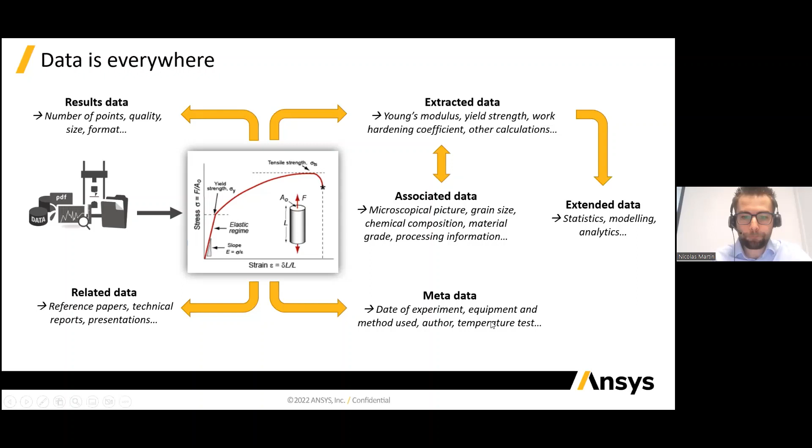Not only is data everywhere here, but it's also available in multiple formats. And the increasing complexity of data formats also allows increasing value to be extracted from it. If I start by talking about 1D data, one-dimensional data, which would be properties of one data sheet, for example, or one property chart, such as shown here.

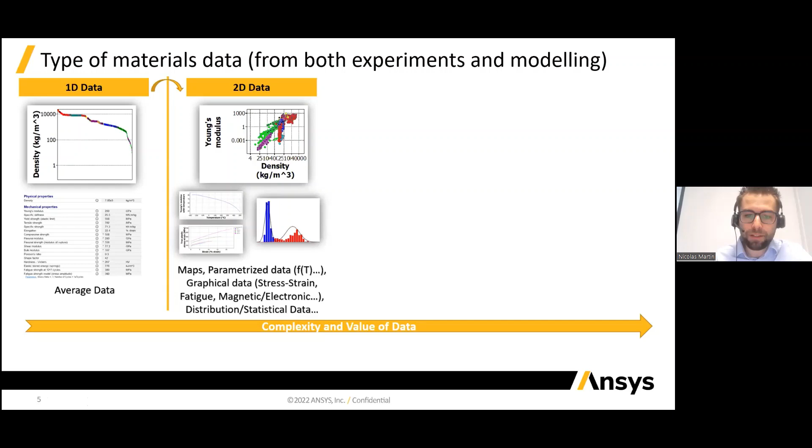If we think about what is available as two-dimensional data, that can be a combination of two properties about materials, such as Ashby plots shown here. But it can also consist of functional data, data evolution against time or temperature, or even statistical distribution of a property, which gives more insights on what the material really is. It's not just one point of property, but a distribution that can be linked to some understanding at the microscopic scale, for example.

And then there's three-dimensional data or other types that also exist, and there's more complex things like sample mapping versus a certain type of property or composition, two-dimensional data sets that are dynamic, such as shown here in this dynamic map, or other types of images, microstructural maps, mixes of data, or even sound that can be associated with materials data.

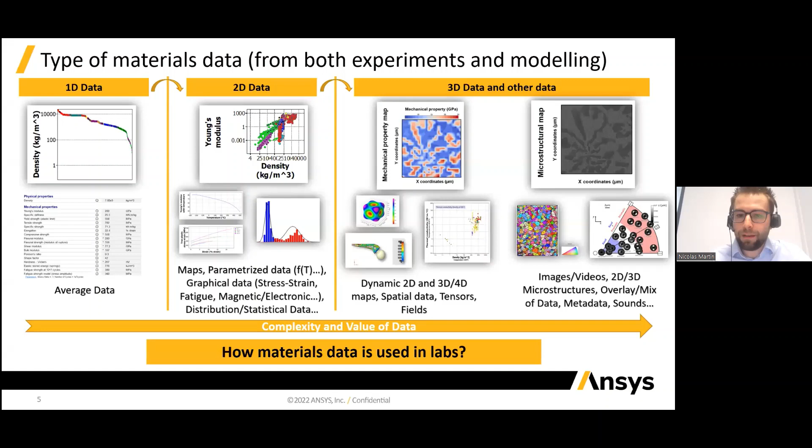So this shows that the growing complexity and levels of data available also enable different, increasing levels of insight and value of data that can be extracted. The question is how typically this type of information is being looked at when you think about research labs.

There's quite commonly two typical materials data journeys in a research environment, which both start with the level of data collection or capitalization. That can be either capitalization of literature review, scientific literature review, but also combining together experimental or simulation outcomes that are being run. And this would typically be digitalized to have access to some form of database.

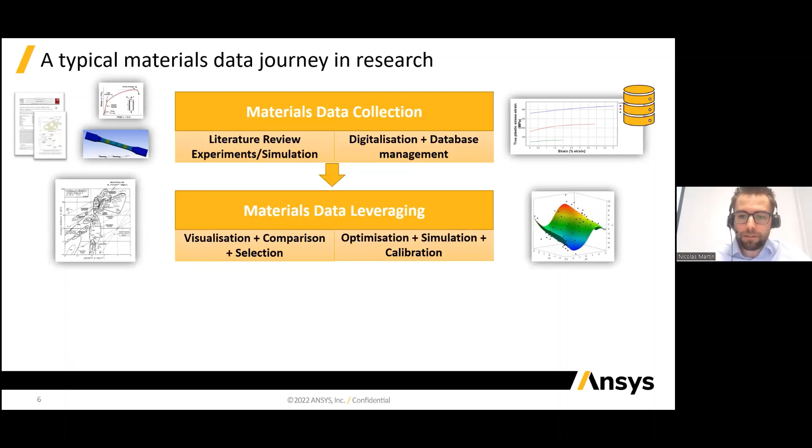Then from there, the next step is actually to look at leveraging the data, trying to understand some concepts or fundamental science behind it, and that can be done through visualization or selection of material, or looking into optimization and calibration of different compositions and properties that we are exploring.

But typically the purpose is to fulfill two major types of research profiles. One is to work on materials and process development, and the other is to work on product design or redesign.

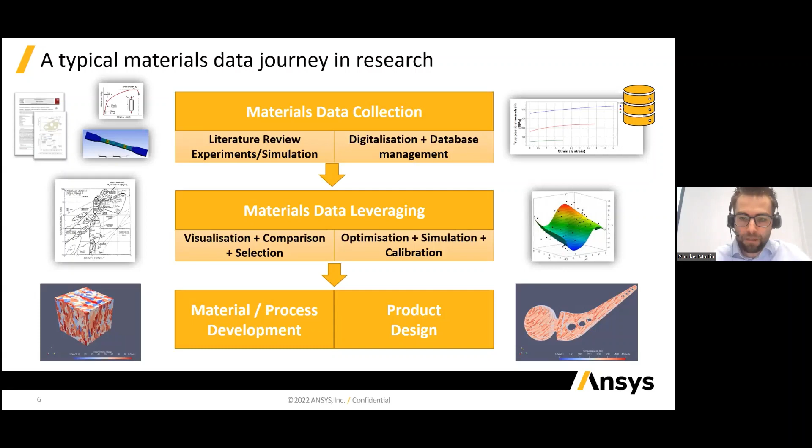So if we look a little bit about these two types of scenarios, an example of material process design strategy is the following one. It's quite common that the starting point is actually to identify some sort of motivation.

A nice way to actually do that is typically to look at the property space of the most commonly available materials and try to identify where there exist holes. By holes, we mean spaces on the charts that would have an interest to be populated by new materials or improved materials, given that it would enable better performance compared to existing materials.

So in this particular example that I'm using to illustrate this, on the left here I'm plotting Young's modulus versus density for the main families of materials. The dotted lines that have been added here represent the contours of a performance index of a panel in bending.

In other words, if we gradually shift this line here towards the upper left of the chart - emphasizing that here we're looking at a chart on a log scale - we are gradually improving the performance index of materials within the line, meaning that if we find a way to actually create materials that fill in this empty space, it will most likely outperform every material for that application.

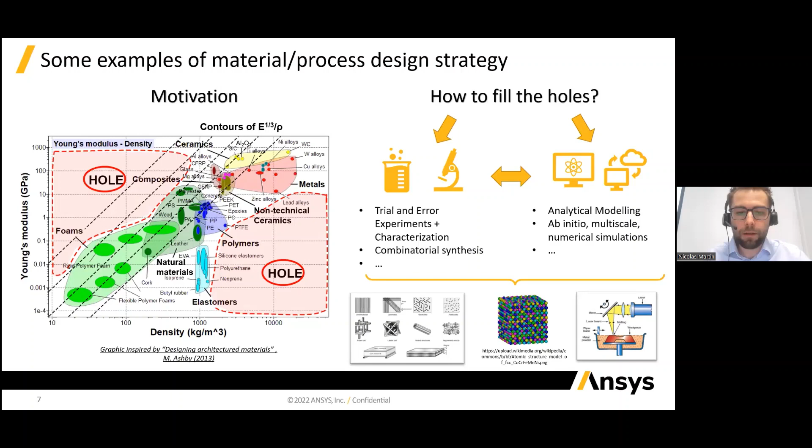And once you've identified the motivation, you can actually look into how to fill in the holes that are mentioned here. That can be either through trial and error experimentation, which is the most classic approach, but it can also be through a different approach, through analytical modeling, ab initio, multiscale, and numerical simulations. The most common practice nowadays is actually to try to find a way to combine those aspects, experimental and modeling, in terms of exploring the property space.

And I was mentioning the creation of these property maps. So one of the things we work on in the Ansys Granta space is a software called Granta Selector, which combines a library, or encyclopedia if you will, of different sets of reference data. Here, where it helps in terms of identifying motivation for research, is that it provides a good ground base for existing materials.

But it also allows for a bit of analytical combination of materials on things such as the rule of mixture for composites, analytical models for hybrid materials, multi-layers, and so on, which basically would enable us to see the potential of combining existing greater materials into new structures, new formats of materials, and see how they would outperform the existing material property space.

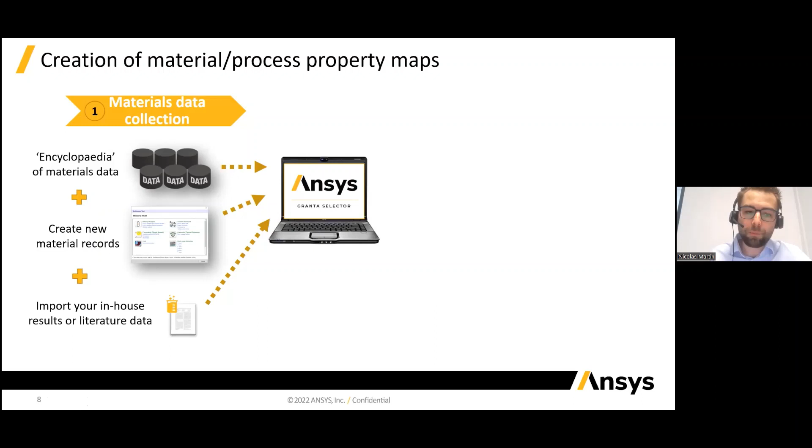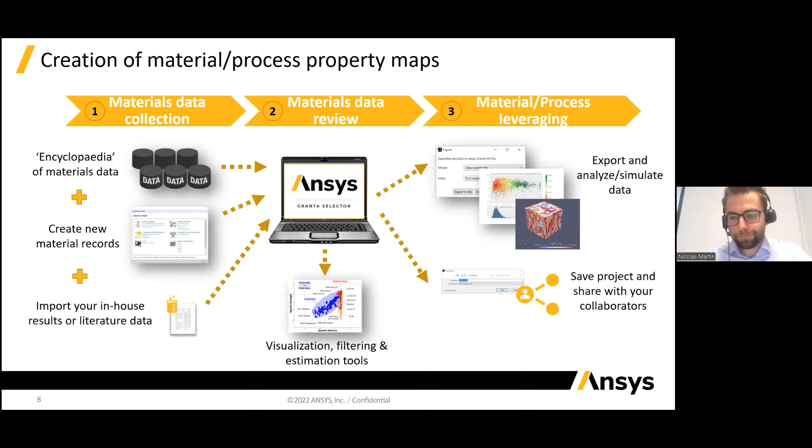And by doing that, you can start to communicate and argue on the potential and the direction that different research projects should be going into. So that was about the material and process development approach.

These top candidates would typically be used to go on the next stage, where you look at the optimal design, and that's where you would use the material candidates for finite element analysis setups in order to benchmark the materials and find optimal design. The intent behind is there again to evaluate the trade-off between the different objectives that are fixed within the project's description. And it's quite common that this is actually not really a linear process.

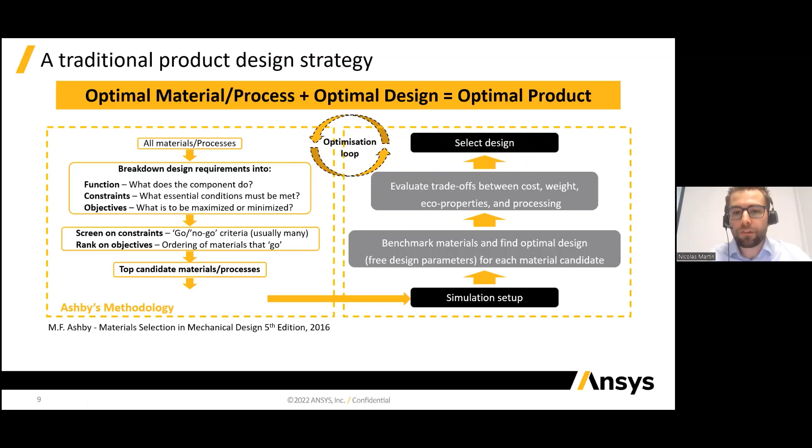And to keep things short, it consists of taking into account the fact that in the vast majority of cases, 80% of the future costs of product development are embedded in the initial design stage. And by finding a way to do what-if scenarios at a simulation scale, or if you will, deploying some level of virtual prototyping much earlier than the way simulation is used nowadays, if you're able to achieve that, you actually make a lot of progress in terms of time and cost savings compared to traditional design.

Another approach to advanced design strategy is integrated computational materials engineering, or ICME. And this is trying to have an approach where you look into process, structures, properties, performance, and multi-scale interaction, where basically at each level of scale of product development, you have an approach of experimental and modeling that talks to one another within the same scale, but also with the different levels of scale.

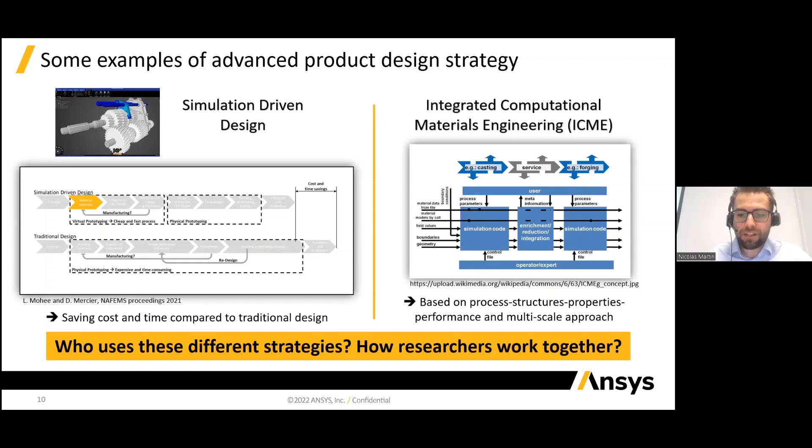In these cases, there are typically PhD or postdoc students who are the most active in terms of running some of the experiments or simulations. And it's not always the case that they are familiar or have the best practice in terms of doing capitalization of their data. Now, they would typically be discussing a lot with their direct supervisors, who typically would like to have easy access to analyzing the tons of data that their students are generating to look in depth at some of the analysis that can be done.

Most research is also nowadays connected to a more modeling or numerical plan of a project. So most likely within the same research group, there will be a numerical modeling expert involved. And for him, the interest in terms of material data access is to know which material inputs he should be using for the simulations and what are the models that have been confirmed by experiments. And finally, there can be some external partners for whom the interest is to have access to the homogenized data from their academic partners.

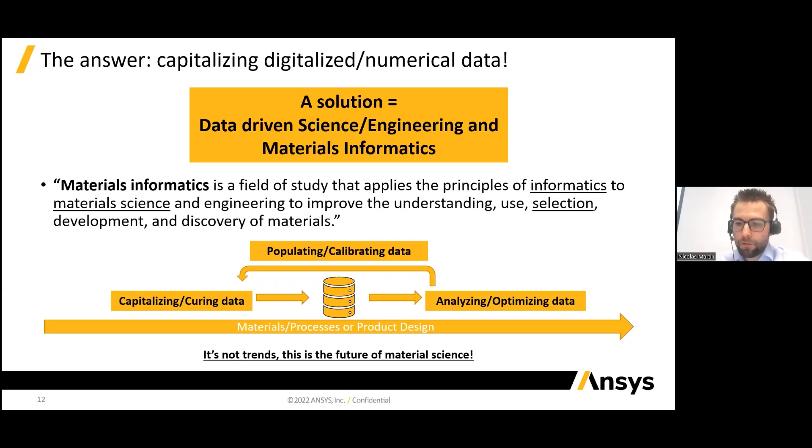And this is very simply schematized here, but it's not just a trend, it's really the future of material science in terms of helping in the understanding of some of the behaviors of existing and new materials.

Now, when we talk about digitalization of the materials research space, if we think about other sectors and how they've come to transform from a digital standpoint, there's many areas which are already quite ahead. If we think about product design or CAD, finance, human resource, these are sectors that are already quite well transformed from a digital standpoint. Materials up to now had tended to be a bit behind.

There's a few reasons for that, some of them being the fact that it's a technically complex domain that puts together multiple aspects of fundamental science, which requires highly technical skills to put in and use wisely in a digital format. When it comes to the industry side, materials are things that are typically owned across multiple departments. So that doesn't help into having a standardized way of thinking about materials properties and how we store information.

And still on the industry side, materials departments would tend to be seen as a cost center rather than an area where an industry could invest to gain some time or to develop innovation. Now, all of this has been changing. There's the global digital transformation trends that really influence this. But there's also the factor that there's an explosion of data available. And that also applies to materials research.

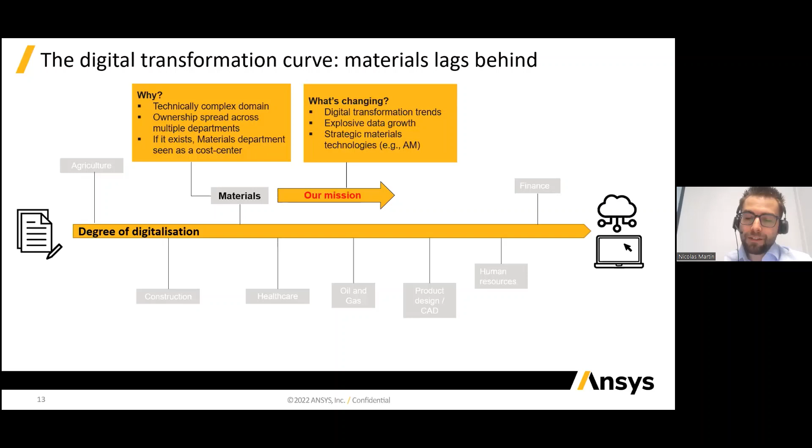Another reason for this change happening is that some strategic material sectors do need digital transformation to actually really burst. If we think of additive manufacturing, for example, this is an area where having this digital transformation approach is crucial for its development.

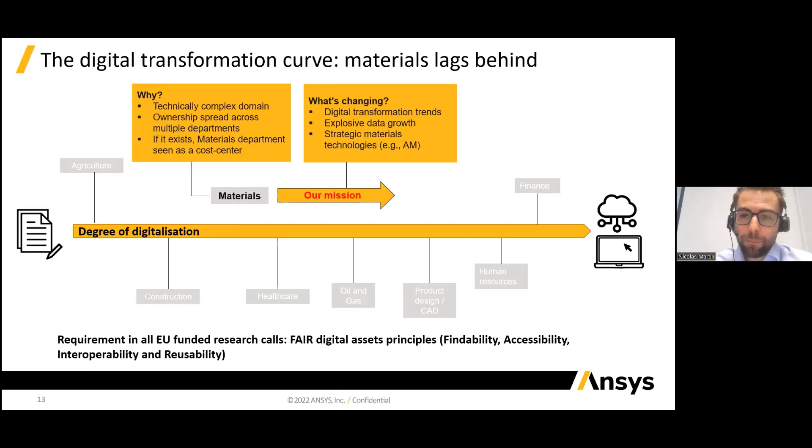Now, still relating all of this to research projects, this component of digitalization is more and more looked into. And when we have a look into the current EU-funded research calls that exist, they now all tend to require that the project has a plan to fulfill the FAIR digital assets principles. So FAIR is for findability, accessibility, interoperability, and reusability requirements.

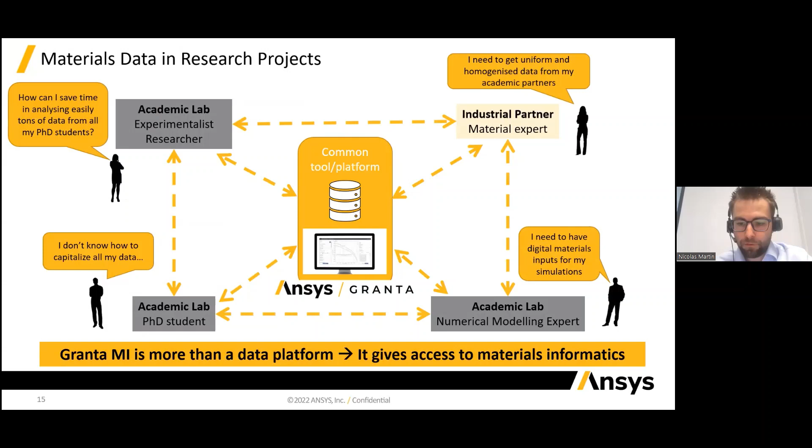So that leads me to talking about the Ansys Granta platform that we developed in the intent to help data-driven science and engineering. If I go back to the picture I was describing a little bit earlier, what we're really trying to address here is to put a central common tool or platform, if you will, and this is our Granta MI software, in the center space of research projects. And it should not be seen only as a data platform. It is also something that gives access to the materials informatics that I was referring to a bit earlier.

And in these areas, we typically link the outputs of these simulations to simulation automation and optimization platforms on one end, but also running these simulations requires having access to materials information management, because if you think about it, every starting point of simulating these different types of physics requires an input in terms of materials modeling. And that's where the Granta MI platform comes in.

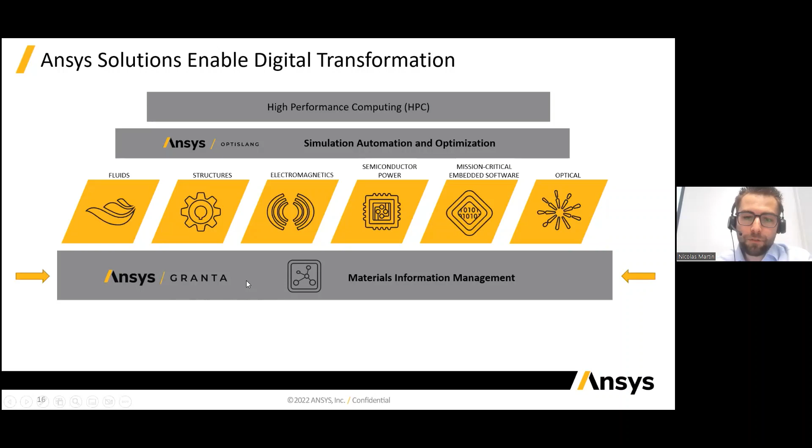It is a very unique space where you can have the simulation require some inputs in terms of materials properties, but also this is a space where the outputs of the simulations can be embedded and captured.

So from a practical side, what are we talking about when I talk about Ansys Granta MI? As opposed to Granta Selector EduPack that I was mentioning earlier, which is a local software with databases that are fixed, the Granta MI platform is a server-based software. It's based on the SQL technology for those who are familiar with it, and it is accessible to users in the web browser interface.

What will be populating the system? Well, it can be, of course, all the proprietary information from the organization where it's being used. That can be legacy historical data that could at this stage be spread out everywhere in different formats, and we have ways to import all this legacy data in a centralized way, but it can also be fed in by connecting the platform to existing characterization techniques and testing machines with automated import. There's a possibility to also have access in the database to external libraries of reference data, and that really depends on the applications.

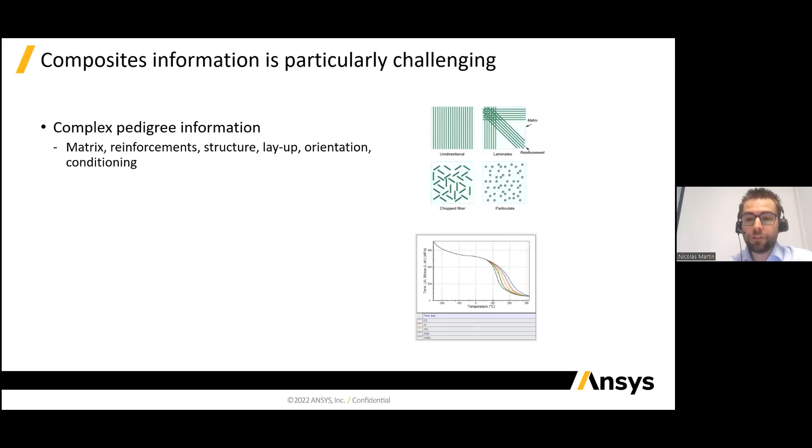Composites also require some specialist types of testing and data, for example, adhesive bond strength or fiber tow counts. These are types of properties that are unique to this material subset. There's also the anisotropy component of composites, properties varying in different directions. And there's finally the dependence of the properties on process history and part geometry.

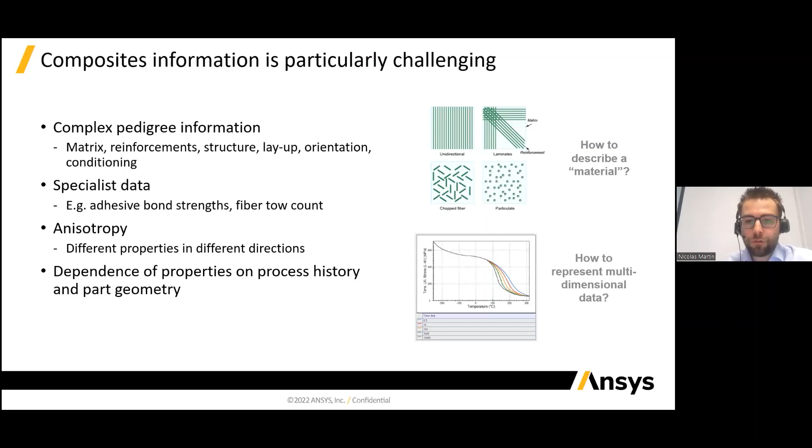So here the question is how to describe material data and how to represent those multidimensional data. And that's where having good expertise and understanding of how your data structures should look is important. In the Ansys Granta MI platform, we do have a dedicated schema, or database structure if you will, that reflects the specificity of composite materials.

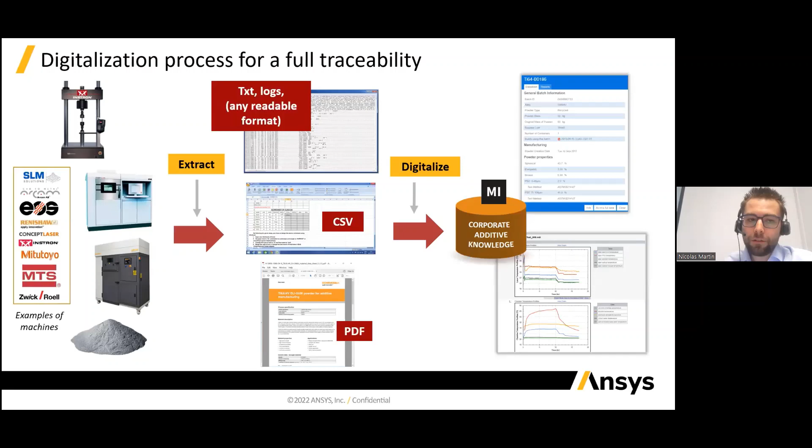So if I now continue explaining a bit on how the platform is used from a digitalization standpoint, if you think about different testing or equipment machines, here in the example of additive manufacturing, this will generate typically different formats of raw data that can be text, CSV, PDF, images, and so on. And the Granta MI platform allows to automatically configure the machine output to be embedded in the right format in the database and quickly have access to the correct values and format.

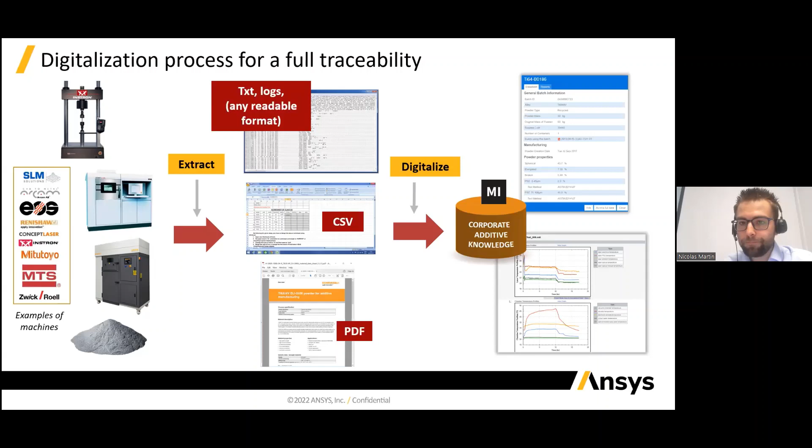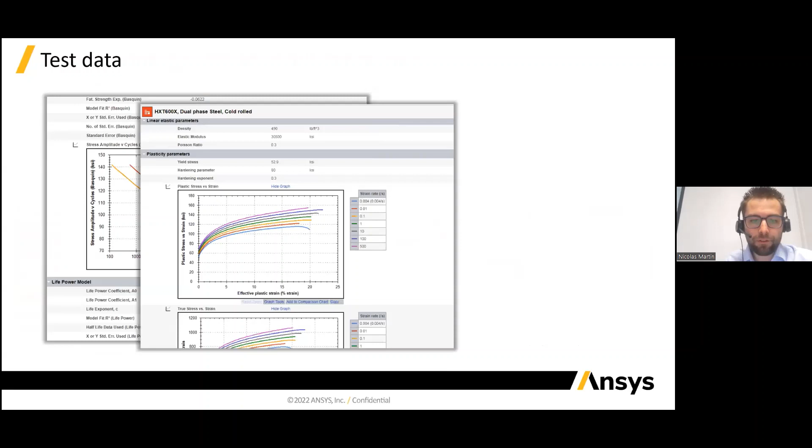What I'm showing here, continuing on this example, is a few screenshots of a material record that a user would be accessing on the web interface. We see that there's different properties that are in the materials record. Here we also have a bit of fatigue information and curves. It can be different curves, types of data, such as stress strain here, for example, or we could think of creep or temperature dependent properties. But it can also include other types of information about material, things like images of the samples and additional analysis that we might have been doing with different techniques.

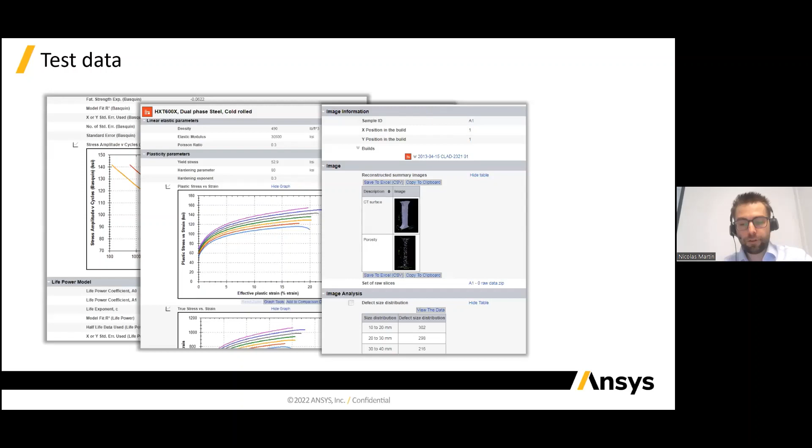Another important tool to emphasize when it comes to the platform is the fact that it allows things like Python, MATLAB, or R inquiries to come in and take some part of the database or the properties to run in-house tools. And that is quite handy if you need to do advanced calculations or modeling tools based on existing routines you might have already created. And because the platform is open for such scripts to make inquiries, it allows an automated way of exporting data, running some calculations, and importing it back with traceability of what has been applied to the data.

On the Python side of things, there exists now on GitHub an Ansys group where such scripting tools are being made available as the community starts using them. Now to conclude the presentation, I'll finish the last part here by talking a little bit about industry and research usage, emphasizing a little bit more the collaborative environment component here.

This was all done in sequence before and stored in different ways. Now, there was clearly value here in creating a materials properties database and a simpler modular workflow using Granta MI platform with the intent to do parameterization and optimization of these calculation and modeling outcomes. So what I'm showing here is the schema that has been created specifically for the project. You don't need to look at the details. I'll emphasize a few points.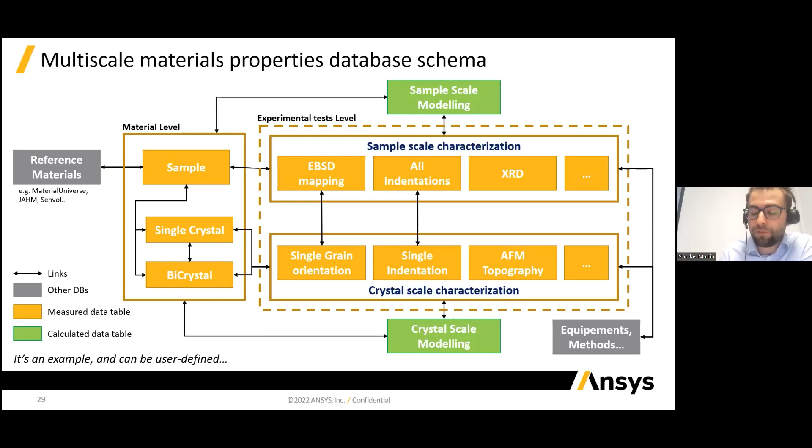The first one is that all rectangles in yellow represent measured data tables. And we have on the top measured data tables of sample scale characterization, and on the bottom the crystal scale characterization. Both of these groups are linked to the material sample or the different crystals that have been identified from a sample to do the crystal scale characterization. On the outside, there are also links to calculated data tables, on the crystal modeling scale here, or on the sample modeling scale here. So the message is to illustrate that it can be user defined and organized with the intent of addressing the specific research project goals.

So talking a little bit more about what was actually done in this case, there was a full set of data acquisition that was being done on a regular basis.

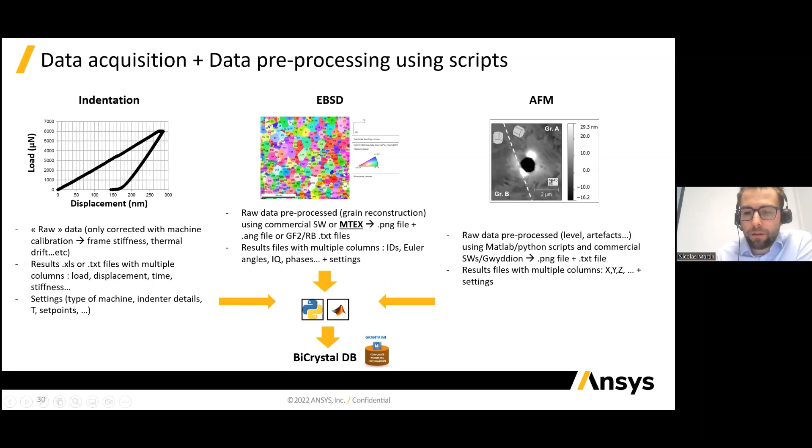The Granta MI platform allowed us to embed an automated pre-processing routine for the raw data, which would automatically import the experimental measurements into the database in the already correct formats. So putting all of this together in a workflow, the platform enabled this database with standardized ways of importing data, from which one could easily start doing different levels of exports of the data.

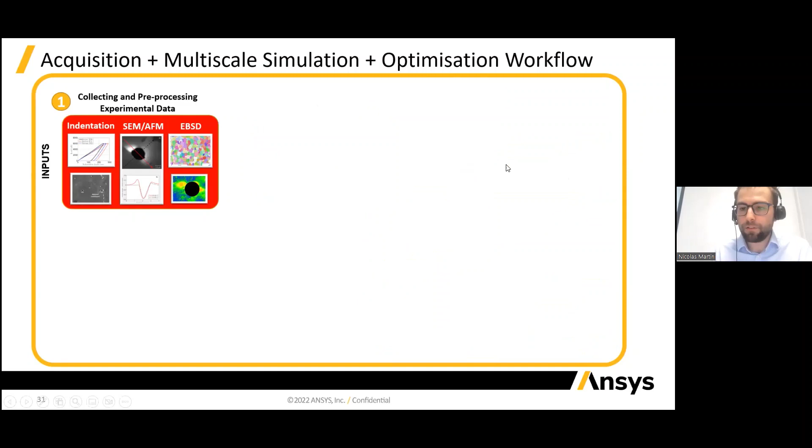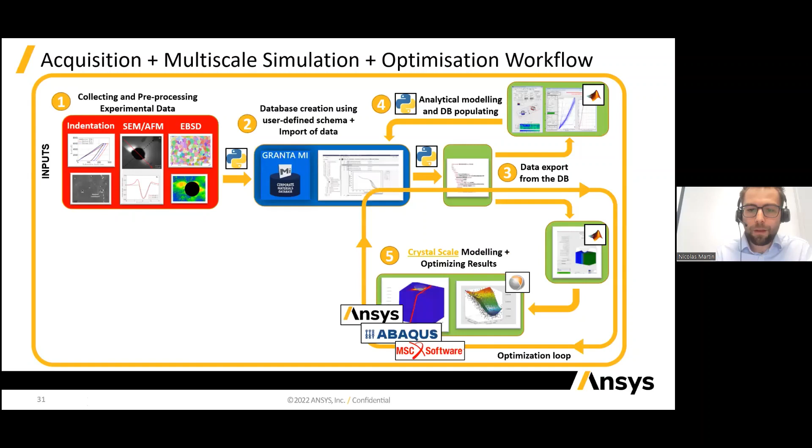The first export routine would be to do a bit of analytical modeling with external software and feed the outcomes back into the Granta MI platform. The next step would then be to look at crystal scale modeling and understand how the simulation of those crystals and the information that was captured would fit the experimental results. And that's where a set of optimizations could come in, to continue to have the traceability in the MI platform and the continuity of the progress made.

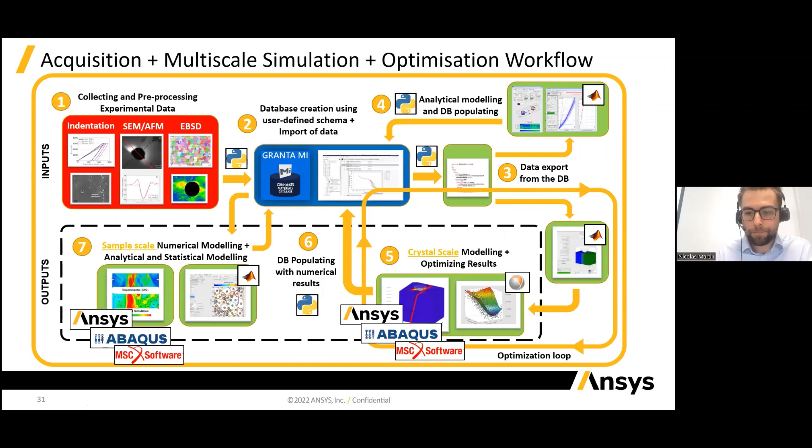And then towards the end, the sample scale modeling would be able to be run, populated by the crystal scale modeling result outputs. The outputs and what had been enabled by implementing this database practice and workflow schema are regrouped here on the modeling and optimization at the crystal and sample scale. So that was more of a specific research project example.

That includes, for example, the Composelector project, which was on composite design, but also things related to metallurgy, such as the Accelerated Metallurgy project. That's one example that I will slightly extend, just to give you some insight into the things we contribute to in these types of projects. Accelerated Metallurgy, in a nutshell: the goal of this project was to accelerate the design of new alloys, and the approach taken was to combine high throughput simulations, high throughput synthesis, and high throughput characterization. And you can clearly understand that high throughput meant an intensive generation of data at each level.

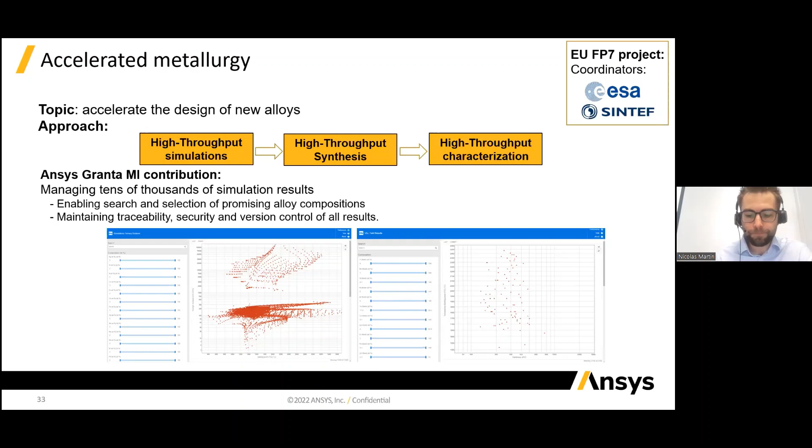And I'll finish by mentioning a more recent project that is now on the go, which started in 2021. This is the INN-PRESSME project, and it has the specificity of looking into bio-based materials in an open testbed approach. Some of the main goals are, one, to develop market-ready products from bio-based materials, and two, to support the digital transformation by providing all the data and life cycle value chain modeling tools for the materials being explored.

So, of course, when it comes to the Granta MI platform and our involvement as Ansys in this project, we are contributing mostly to the second part of this objective, where we are creating the relevant platform to fulfill the value chain modeling tools goal. So that comes to the end of the presentation I had prepared today.

Before coming to the questions and answers, I'm summarizing here some of the things we covered. Organizing data in a traceable way, and then having it available in an interconnected way, is something that really contributes to building knowledge over time and is strongly relevant to the advancement of material science knowledge. And it does that in multiple ways. One can be the speed and consistency in processing the data being generated, but it's also done by making sure the relevant information is shared in a collaborative way.

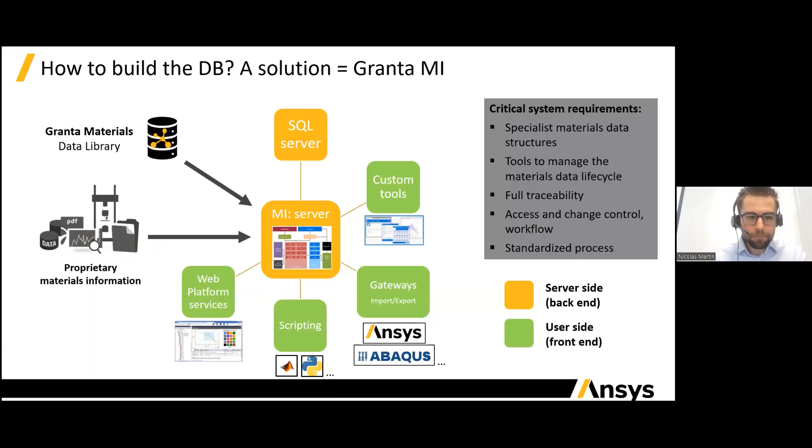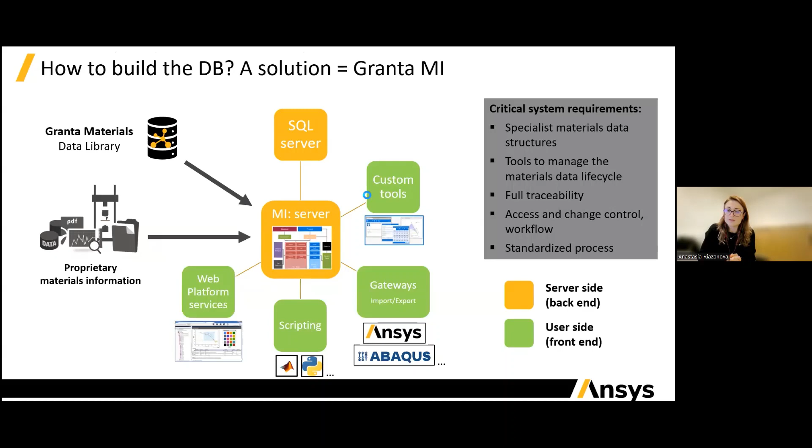I can actually just look it up here. Because basically what I understood, the value of the software that we have, for instance at the Fiber and Polymer Technology Department at KTH, is that we have access both to the existing databases, but we can also create our own databases and then plot them all in the Ashby plots form, for instance, and make our own material properties databases. Yeah, exactly, so you had understood correctly.

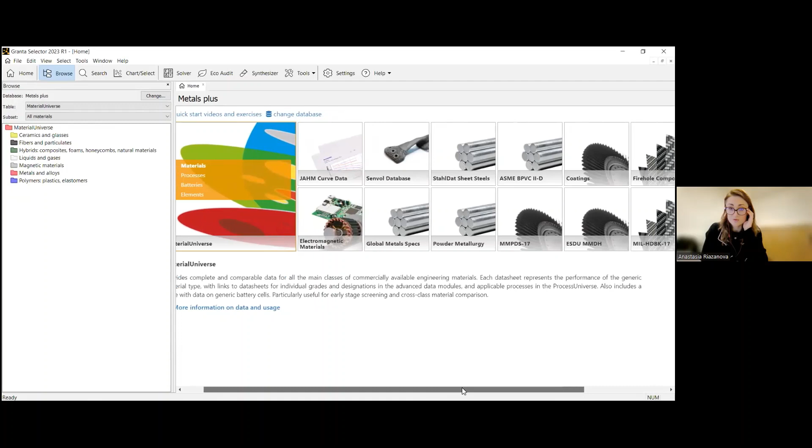So I'm sharing now the screen of the Granta Selector software. Let me open one of the databases. For the databases, you have different packages depending on what kind of material types or properties you need to access, so you can select which you want to look at. Yeah, exactly, there's quite a few databases available, things that relate to additive manufacturing, for example, to composites or coatings materials, or even eco-friendly properties and environmental indicators.

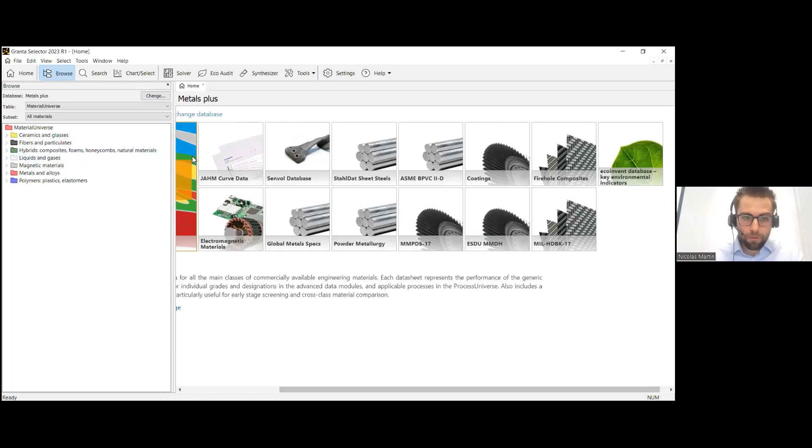In each of these cases, the data can be accessed in a similar way, and so basically each of these topics are data tables which have their own specific structures, given that they address a particular material group or topic, and then from there, that's where you can access different sets of properties.

Now, within Selector, you can indeed either duplicate records or add records and so on. However, this is a localized interface, it's a localized software, it's not a server-based software. So there's quickly a limitation whenever you look more into doing collaborative research where there are multiple stakeholders that change things at the same time.

It doesn't mean that there's no value behind it, what I'm just saying is it's for different usage. Here, the Selector would be maybe a bit more for benchmarking or a small project of adding data. While if you wanted to do it at a larger scale, where there are multiple stakeholders and there's a need for a live database behind it, then that's where the Granta MI platform is on hand.

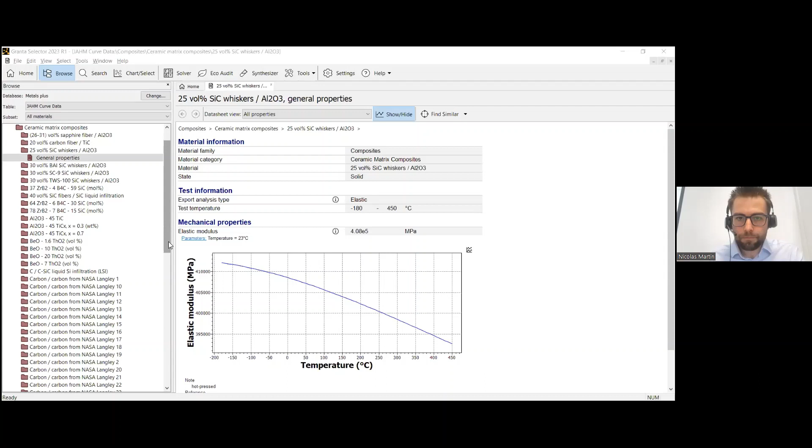Yes. And I think that's very valuable because we are creating new materials. So we can create our own databases and then create our own material universe that we can try to compare and see if they fill those holes that you presented in the Ashby plots. That would be very valuable, and that's what we were doing.